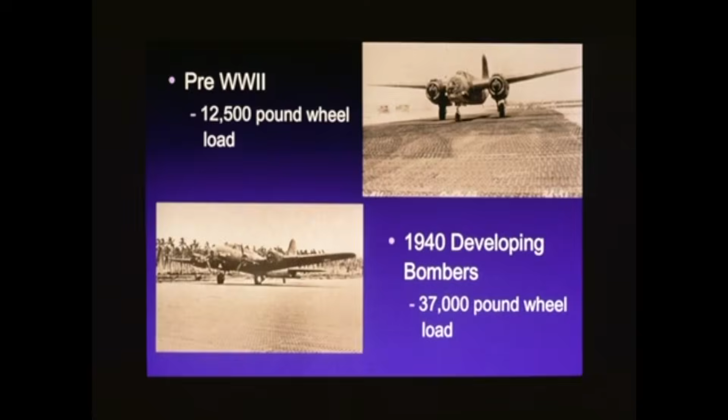Yet, bombers were being developed with wheel loads of 37,000 pounds, and far heavier ones were coming into use. Thus, the Corps of Engineers inherited a complex and urgent problem. At that time, the Corps identified airfield paving design as essentially a soil mechanics function.

Engineers recognized that the primary problem in airfield paving was the failure of the soil subbases under pavements to withstand the loads, resulting in the failure of the pavement.

Corps leaders acknowledged the gravity of the situation, and T.A. "Dad" Middlebrooks of the Office Chief of Engineers had by early 1942 become impressed with a method developed in California by O.J. Porter to calculate the bearing capacity of soils under pavements.

The penetration test was essentially a shear test, measuring the strength of the soil, while the bearing capacity was an index of that strength. Upon calculation, the bearing ratio was referred to as the California Bearing Ratio, or CBR, which provided a quantitative expression of the strength of the soil. Whether the CBR could be adopted and adapted to the complexities of airfield paving was debatable.

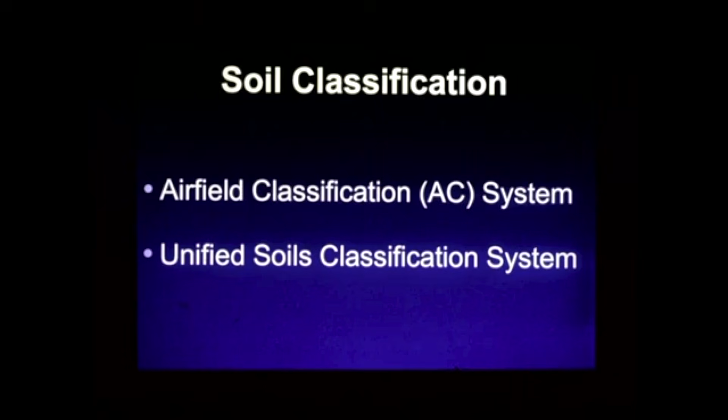Now, this is a table taken directly from a text entitled Introduction to Soil Mechanics and Foundations by Sowers and Sowers. I just want to read for you the caption under the title, but it says, after U.S. Waterways Experiment Station.

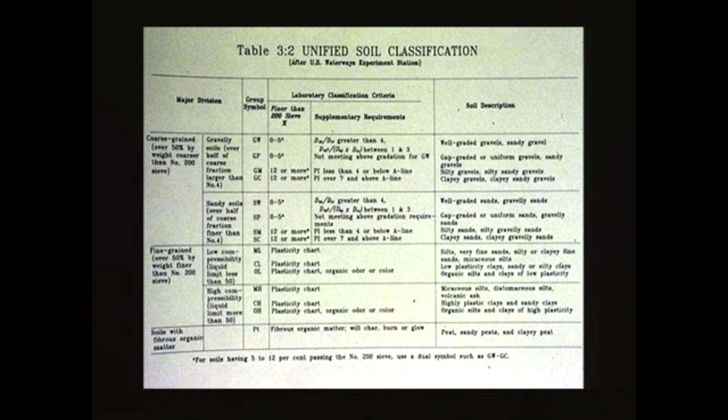This is a plasticity chart, again, taken from a text by Sowers and Sowers. And again, let me just read the acknowledgments at the bottom. It says, after A. Casagrande and the U.S. Army Waterways Experiment Station.

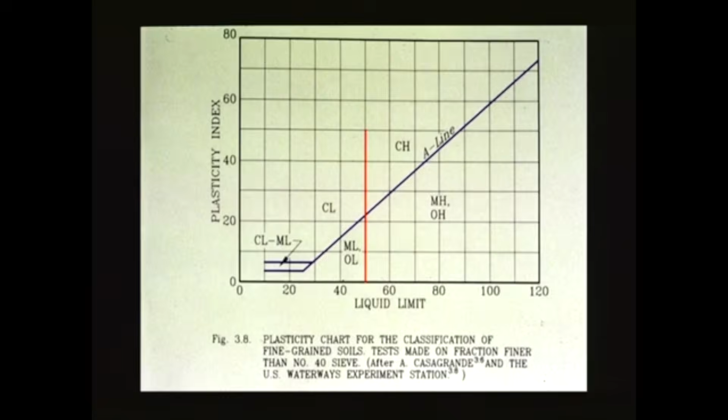All of this grew out of our country's needs for airfields in World War II. The Unified Soil Classification System may very well be Casagrande's greatest contribution to soil mechanics because of its wide and important use in the practice of geotechnical engineering today.

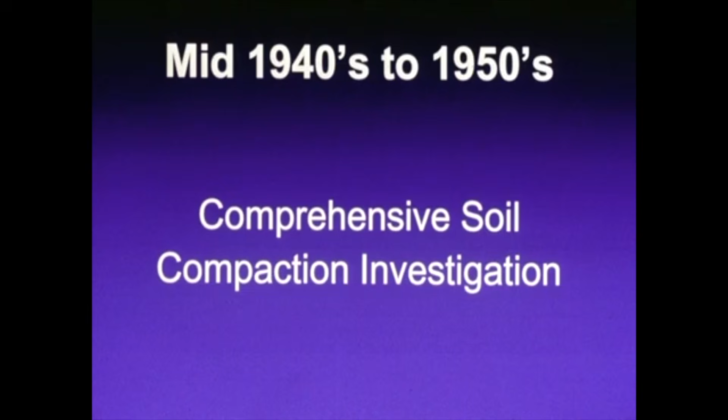Airfield designers had long recognized the importance of compaction of base and sub-base materials prior to paving, especially where flexible pavements were to be used. However, no systematic analysis of compaction requirements had been performed for airfields prior to the end of World War II.

In May of 1945, OCE authorized a comprehensive soil compaction investigation, and in June assigned the testing to WES. Immediately, project directors A.A. Maxwell and Cecil D. Burns, both engineers at WES, attempted to locate materials in the vicinity of Vicksburg.

A source of material was found, and a mixing plant built on location blended soils from a pit in large quantities, and these were spread by drag lines onto 200-foot-long test lanes.

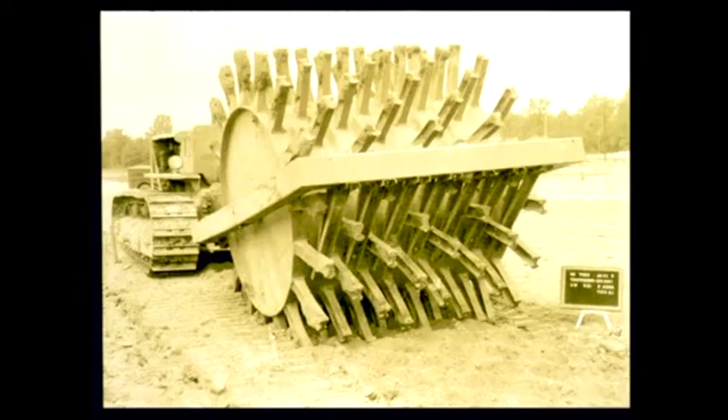Drivers then passed various compaction machines repeatedly over the lanes. This is a slide of an early sheep's foot roller.

Researchers varied the water contents of the soil, the number of passes, the types of machinery used, and other components in a complex series of tests. Field and laboratory examinations determined compaction and CBR data that were produced by each set of variables. From this, specific compaction expectations and methods under field conditions could be predicted for future construction.

In April of 1956, W.J. Turnbull and Charles R. Foster published their seminal paper entitled Stabilization of Material by Compaction. This was also later published in the Transactions of ASCE in 1958. Let me now read from the synopsis of that paper.

A soil can be stabilized by compaction at proper water content. This paper shows the relationship between strength and both water content and density for cohesive soils, and it describes the variation in density and strength produced by variations in rolling and lift thicknesses in field compaction.

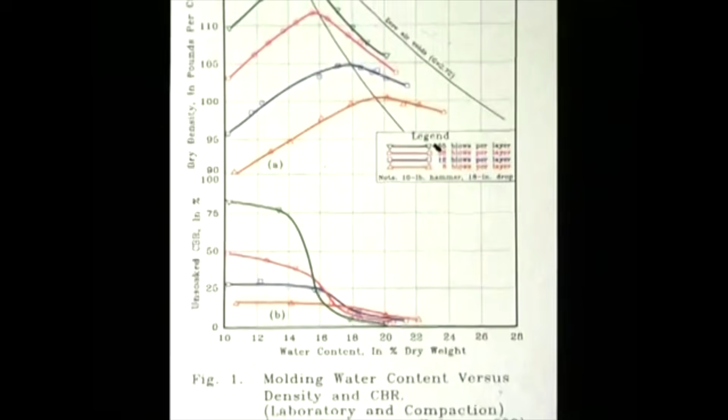These are some of the data presented by Turnbull and Foster, and across the bottom you have water content. You've got unsoaked CBR and dry density, and this is for 6 blows per layer, 12 blows per layer, 26 blows per layer, and 55 blows per layer with a 10-pound hammer falling 18 inches.

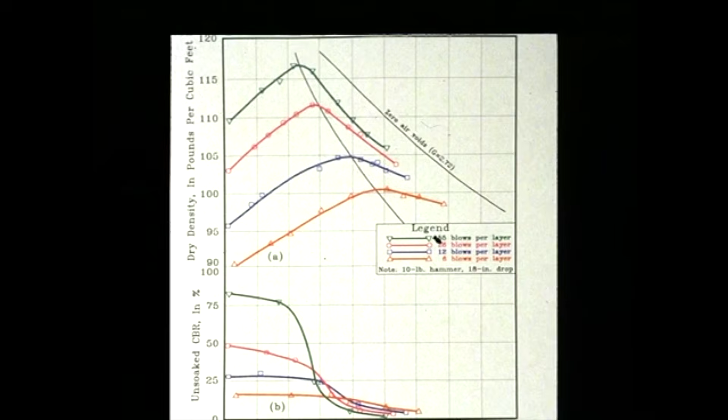This is another picture from the Turnbull and Foster paper, and again across the bottom you've got number of passes, up the side, maximum dry density and optimum water content, and we're looking at sheep's foot rollers with a 7 square inch foot, a 14 square inch foot, and a 21 square inch foot.

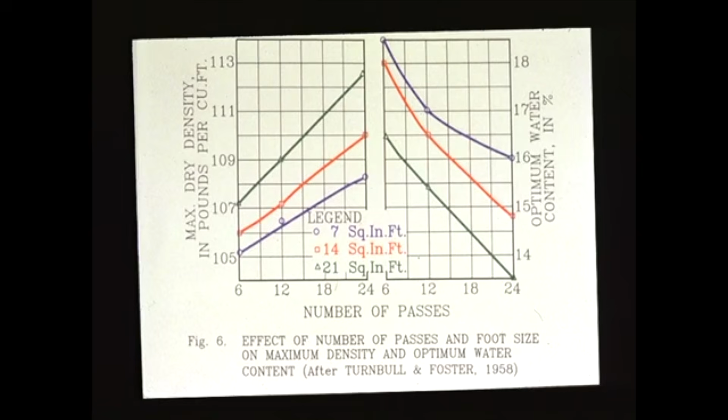Let me now just quote from the acknowledgement section of the paper. The studies described herein were conducted under the Office Chief of Engineers as part of an overall development of design criteria for airfield pavement for the United States Air Force.

Gail McFadden, Thomas Pringle, and F.B. Hennion of the Airfields Branch of the Office Chief of Engineers monitored this study, for which guidance was furnished by Arthur Casagrande, Donald W. Taylor, Kenneth B. Woods, O.J. Porter, and Philip C. Rutledge, acting as consultants. The laboratory and field work were accomplished by the Flexible Pavements Laboratory of the Waterways Experiment Station.

John Focht discusses the paper. And let me thank John for coming.

John will have heard this lecture twice, and I think my wife is the only one who's heard it more than twice, but Margaret says it gets better every time. John, I hope you think so too.

John also discusses the paper, and he flags the point that moisture content is certainly as important as density control.

Focht states that engineers should determine why compaction is desired, what he or she wants to achieve with it, and how he or she intends to accomplish it.

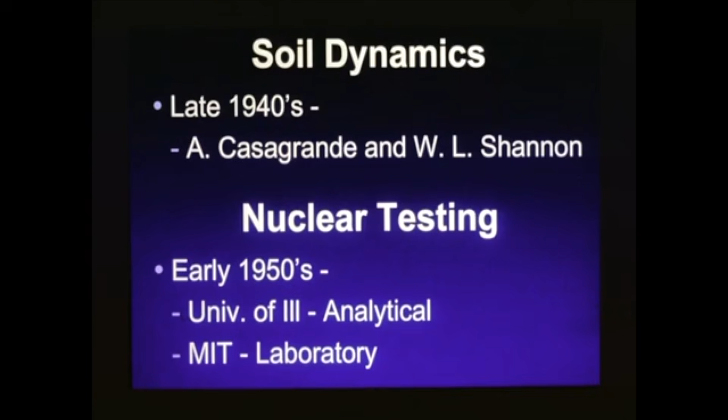In the late 1940s, W.L. Shannon and Arthur Casagrande performed the first dynamic tests on soils in the United States at Harvard. These stemmed from the fear of the effect of nuclear blast at the Panama Canal. Soil dynamics attracted relatively little attention until the 1950s, when the proliferation of long-range missiles carrying nuclear warheads capable of producing massive ground shocks aroused new concerns.

I'll now briefly cover work, both analytical and laboratory, that was conducted in the early 1950s. During the 50s, Professor Newmark and his colleagues at the University of Illinois conducted research involving the design of underground protective structures. Much of the work involved the conduct of experiments to aid in the development of numerical methods that could be used to design underground nuclear protective structures.

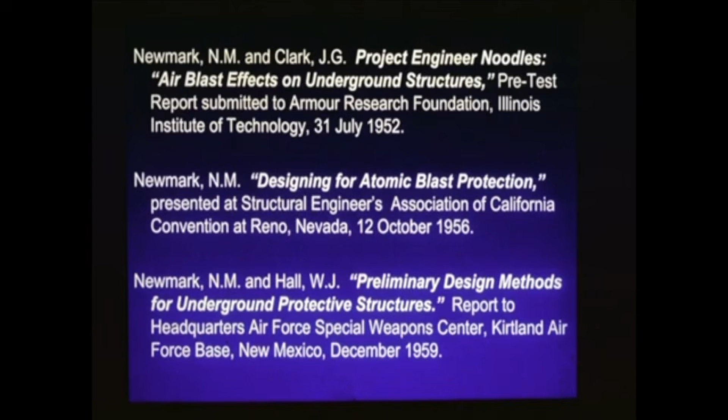The testing was conducted by the Defense Atomic Support Agency, primarily at what we now call the Nevada Test Site outside of Las Vegas. Let me call your attention to the center report here, published in 1956, entitled Designing for Atomic Blast Protection. That's a live load most structural engineers prefer not to deal with.

Strategists in the United States during this period also feared the impact of near-miss nuclear explosives on strategic defense systems such as underground missile silos. The thought was that if we have an underground missile silo and it gets a direct hit, we will sacrifice that. But if it gets a near miss, we'd like the bird cage to open and the bird to get out.

To supplement the field projects, OCE in 1951 turned to Professor Donald W. Taylor at MIT to perform a laboratory investigation on the response of soils to rapid, intense loading. During this study, Robert V. Whitman developed a large triaxial testing machine that produced a single rapid loading on samples in an attempt to simulate the shock of the explosion.

If you're really interested in knowing more, I would call your attention to the paper by Whitman, Behavior of Soils Under Transient Loading, Proceedings of the 4th International Conference on Soil Mechanics, 1957.

Now, in 1957, OCE placed WES in charge of future studies in the area. Turnbull continued the contract at MIT to perform another series of laboratory investigations, which was completed in the late 1960s and produced some 27 reports. Robert V. Whitman was the principal investigator on this contract, and this slide shows 4 typical report titles: one dealing with the shearing resistance of sands under rapid loading, one on wave propagation velocity, another on stress-strain time behavior, and a 4th on the response of soils to dynamic loading.

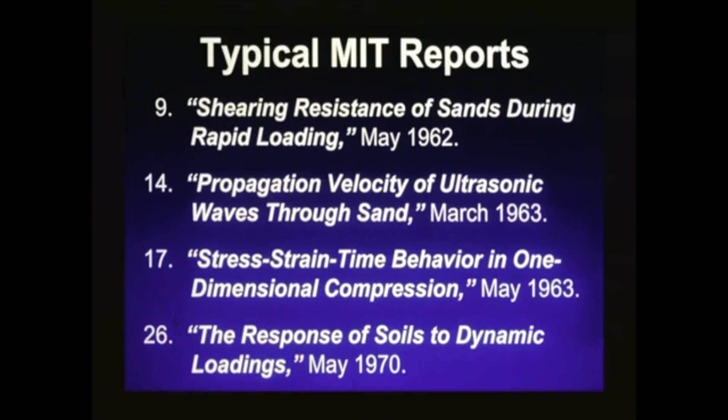During this same period, parallel work was ongoing at other universities, notably the University of Illinois, and that's the one I'm going to highlight today. I'd like to highlight a report entitled Energy Absorption Capacity of Granular Materials in One-Dimensional Compression by A.J. Hendron, Jr. and his colleagues at the University of Illinois.

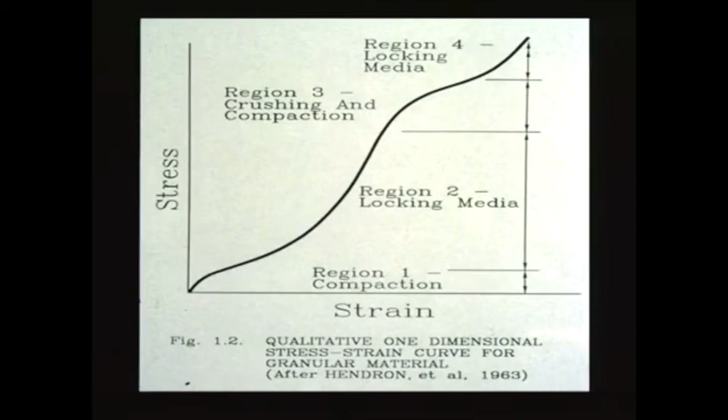The work was done for the Air Force Special Weapons Lab at Kirtland Air Force Base. Let me paraphrase from Skip's report. This is a schematic stress-strain curve with strain across the bottom and stress up the top. Skip says, as the stress continues to increase in the neighborhood of 1,000 to 5,000 psi, the contact forces become so large that particles begin to crush. The crushing is accompanied by a certain amount of rearrangement that is reflected in the concave downward stress-strain curve shown in region 3.

Energy is absorbed in this range by the creation of new surface area during crushing, and energy is dissipated as heat due to rearrangement of the new particles into a denser configuration. Both of these mechanisms absorb energy which is no longer in the form of recoverable strain energy. This work was published in 1963.

Again, the point I'm trying to make is that in the early 1960s there was a great deal of study ongoing with regard to soil properties, particularly dynamic soil properties, dynamic nonlinear soil properties at rapid, intense loadings. Because of time constraints, I'm not going to cover all the work that went on at that time at various locations, including WES, to predict dynamic response of underground structures. But I believe that this work greatly influenced the way we approach dynamic soil structure interaction problems today.

Now let me change subjects slightly.

Difficulties with Nike Zeus tracking radar systems located at White Sands Missile Range, New Mexico, caught the attention of foundation specialists in the early 60s. Unexpected movements resulted in sudden changes of direction or stopping of the radar trackers as they located targets, and further vibrations occurred as the antennas developed precise focus on missiles after launching. WES was asked to investigate the problem. Primary responsibility for this study fell on 2 engineers and a scientist, Robert Ballard and Z.B. Fry.

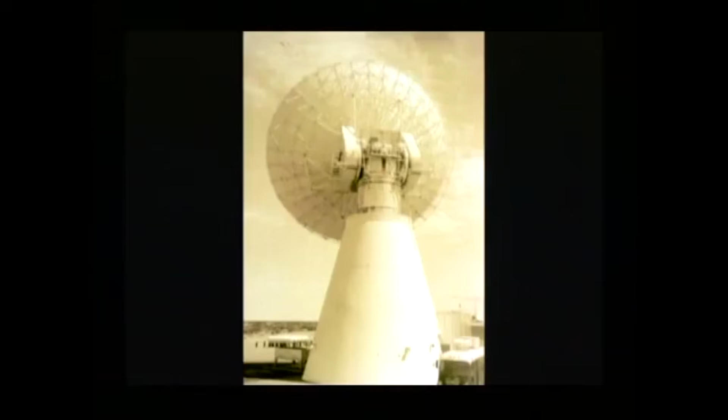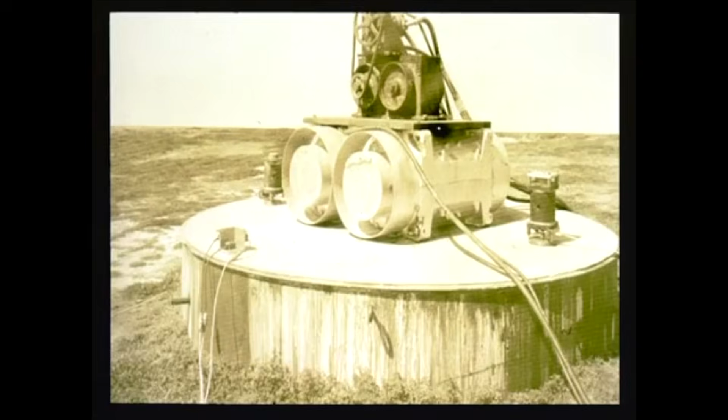This is a slide of the radar tower. Notice the circular foundation or footing. WES modeled these footings and conducted model tests both at Vicksburg and Eglin Air Force Base. This picture depicts one of those model foundations.

The forcing function was provided by an eccentric mass vibrator that had been used by the Navy to test ships in World War II. The Navy first loaned and then gave the device to WES. Weighing 5,600 pounds, the cumbersome machine and its large electric generator had to be moved by a crane. It could, however, simulate motions in 3 directions: vertical, torsional, and rocking. Placed on a circular concrete base at WES with varying static loads, it applied a dynamic load of 20,000 pounds.

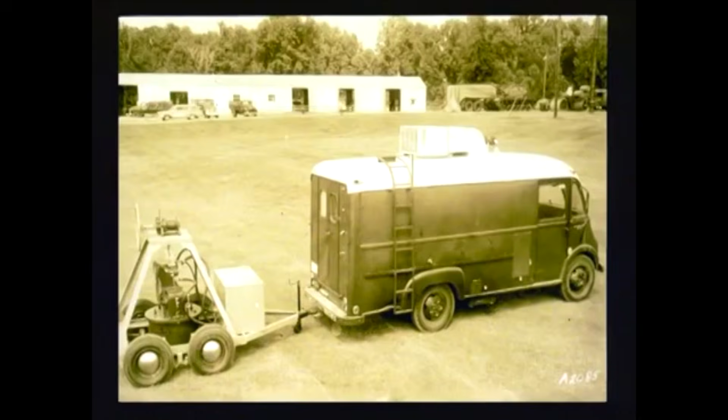Using the Navy machine as a model, WES designed a scaled-down version with a hydraulic motor capable of generating 3,600 pounds of force. The mobile apparatus shown here was trailer-mounted, pulled by a truck, and could operate on power generated by the truck engine. Its primary purpose was in the determination of Rayleigh or shear wave velocities to a depth of about 100 feet.

Many of these consultants took the WES data back to campus and developed theoretical and analytical approaches for predicting dynamic footing response. For example, I'd refer you to a paper entitled Footing Vibration with Nonlinear Subgrade Support by Funston and Hall. Let me also highlight 3 other important papers that came out of this investigation: one entitled Dynamic Response of Footings to Vertical Loads by John Lysmer and Bart Richart; another entitled Comparison of Footing Vibration Tests with Theory by Bart Richart and Bob Whitman; and a third, Design Procedures for Dynamically Loaded Foundations by Bob Whitman and Bart Richart.

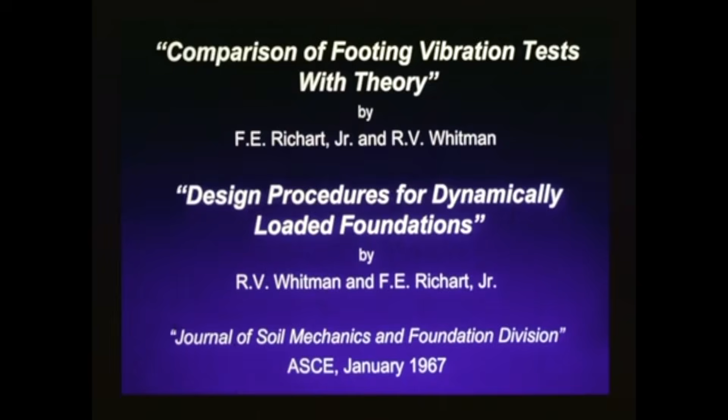These 3 papers were published in the ASCE Journal in 1966 and 1967. This figure shows a uniformly loaded half space and what we now call a Lysmer analog. Let me now show you a couple of figures taken from the Richart Whitman paper of '67.

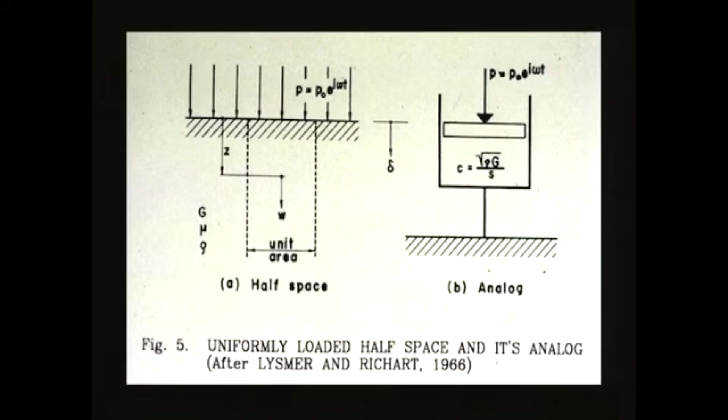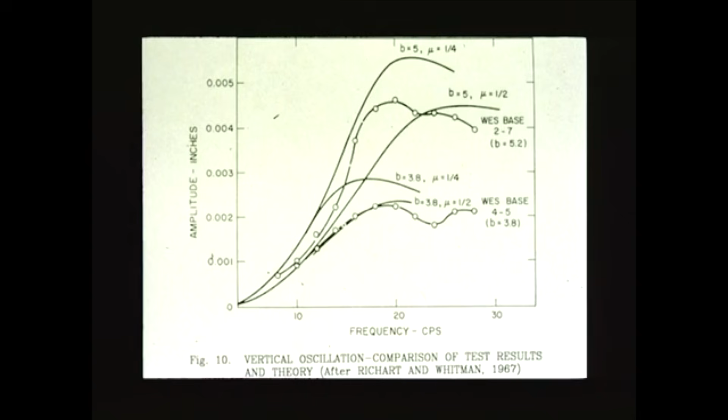Again, this shows a vertical oscillation comparison for test results versus theory. The dots are test results, and the smooth curves are theory.

This is another plot, a comparison of amplitudes of motion for torsional oscillation. The open dots are from tests at Eglin Air Force Base, the closed or black dots are from the Vicksburg site, and the curve is theory. Some of you might not think that's such a hot prediction, but it's not bad for soil dynamics.

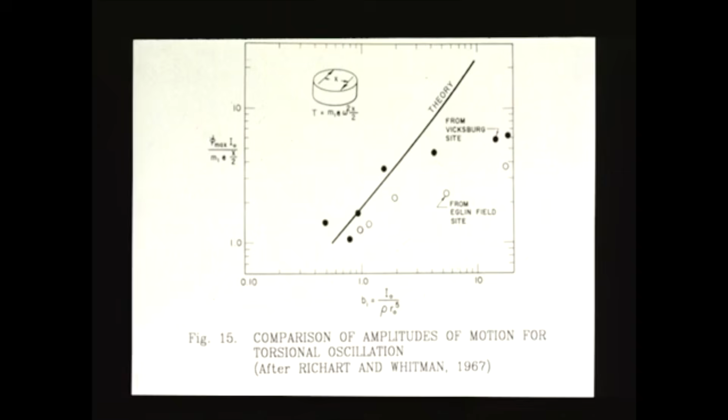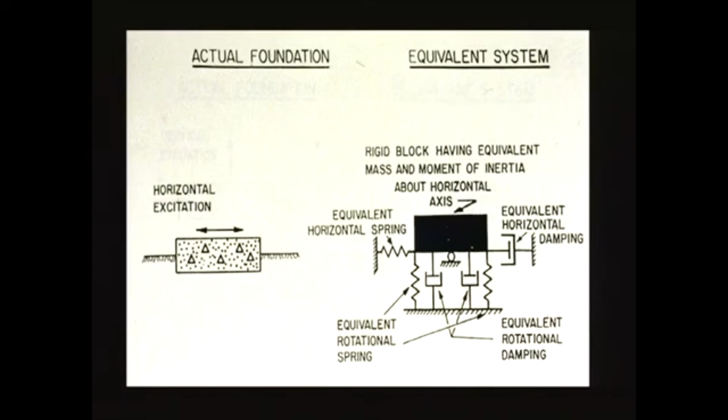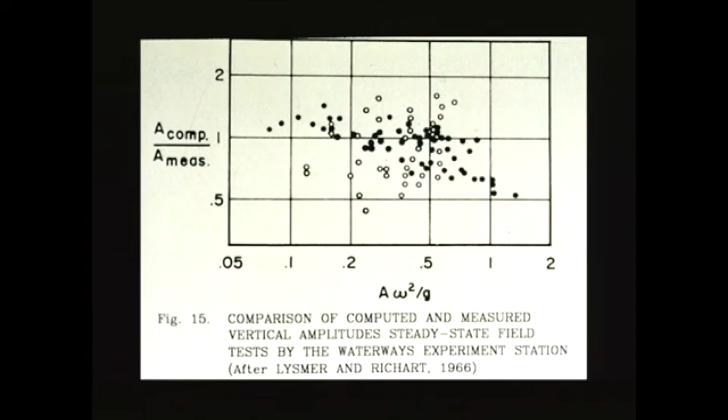This figure comes from the Lysmer-Richart paper and shows a log-log graph comparing computed and measured vertical amplitudes. If everything was perfect, all the data would plot on that line, which is 1. You'll see the data plot largely between 1/2 and 2, so for all practical purposes, the comparisons are within a factor of 2.

Much of this work led to a book entitled Vibrations of Soils and Foundations by Richart, Hall, and Woods. I argue that this work represents the state of the art in the design and analysis of dynamically loaded foundations today. The research confirmed radiation damping. Before this work was completed, people always assigned a large participating mass to the system. This work greatly reduced the size of that participating mass.

In the last 30 years, we have incorporated the effects of embedment, and we have expanded our methods to include geometries other than circular. But that's it.

In preparation for this Terzaghi lecture, I tried to determine the origin of the term rock mechanics in the United States. So far, I've been unsuccessful. Clifton W. Livingston is credited by some as being the father of rock mechanics in the United States.

Livingston was head of the Department of Mining at the Colorado School of Mines during the 1950s. One of the first publications in the field we now know as rock mechanics is entitled An Introduction to the Design of Underground Openings for Defense. This was published in volume 46, number 1, of the Quarterly of the Colorado School of Mines, dated January 1951. The volume was compiled by Clifton W. Livingston and edited by Leroy W. Goodwin.

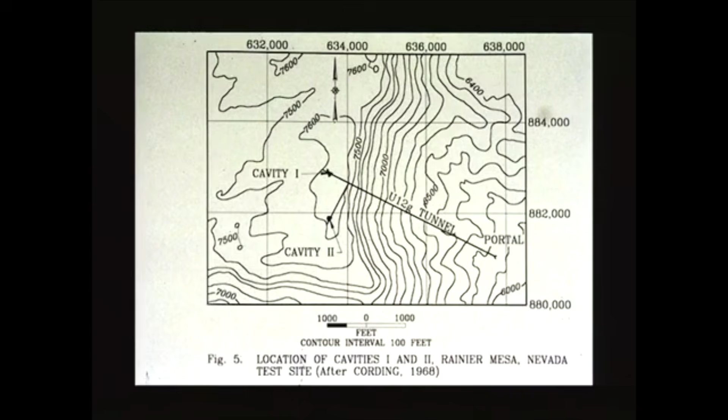The cavities were approximately hemispherical in shape, between 60 and 75 feet in diameter. Excavation started from the tunnel on two raises that were inclined at angles of 68 degrees. The top was domed to prevent stress concentration. Excavation was by blasting, followed closely by rock bolts. This was one of the first uses of rock bolts in the United States in large caverns.

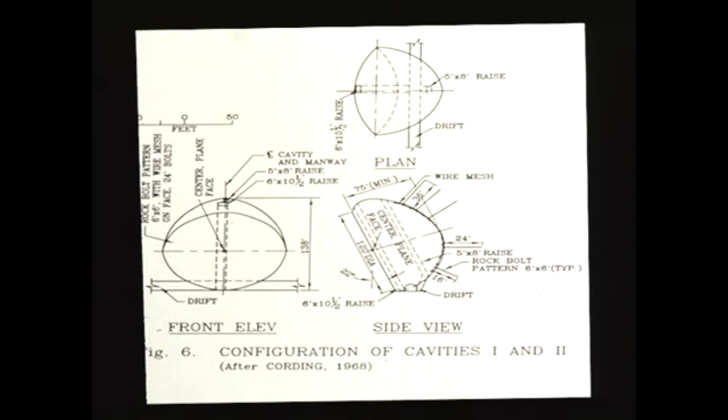Professor Deere's man on the site from December 1964 to June 1965 was Edward J. Cording, both a graduate student at the University of Illinois and a mining engineer with Fenix and Scisson. In October of 1965, Lieutenant Cording was assigned to WES. And during the period October 65 to July 66, continued his doctoral research. In July 66, Lieutenant Cording departed Vicksburg, headed for Vietnam with his entire dissertation in a plywood footlocker constructed by carpenters at the Waterways Experiment Station.

As an interesting sidebar, Ed Cording stopped by the University of Illinois for a day before shipping out to Vietnam. Professor Peck suggested that he take his final examination that day. Deere thought it was a great idea, and they assembled his committee. The thesis was defended that afternoon. The paperwork was to go forward once the thesis was completed. Cording completed the final chapters of his thesis in Vietnam, sending them handwritten to WES. WES typed and assembled the thesis.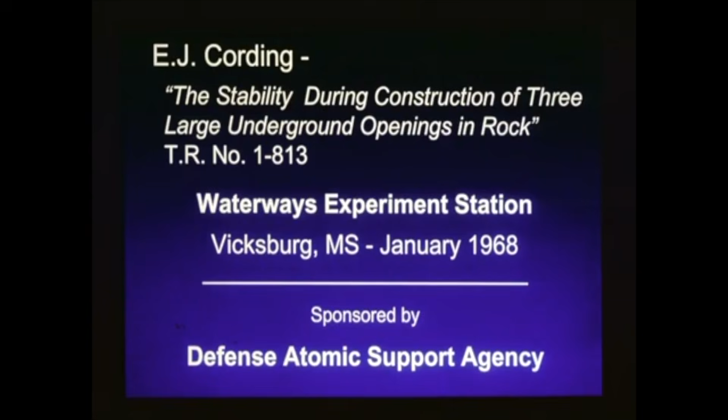Professor Peck and Deere reviewed the thesis, and M.T. Davisson walked the paperwork through the University of Illinois. Captain Edward J. Cording received his Ph.D. in June of 1967 while on R&R in Malaysia before his tour in Vietnam ended. His dissertation, The Stability During Construction of 3 Large Underground Openings in Rock, was published by WES.

But let me mention some names of people who have worked at the Waterways Experiment Station that are household names in the geotechnical community. I'll start with George Osterberg. I've already mentioned John Focht, Jim Mitchell, Mike Duncan, Wayne Clough, and Skip Hendron. I'll stop there because I don't want you to think that all the good ones left.

If you will, let me fast forward to the 1980s when the Air Force Ballistic Missile Office was interested in conducting a study evaluating the effectiveness of rock bolts of various lengths. W.O. Miller, and I know him as Yogi Miller, an engineer at WES, designed and fabricated a polyaxial load frame to conduct physical models of experiments of rock-bolted tunnels. The work involved the development of a large-scale facility, the development of suitable rock simulant, the development of scale model rock bolts, and the testing of model tunnels.

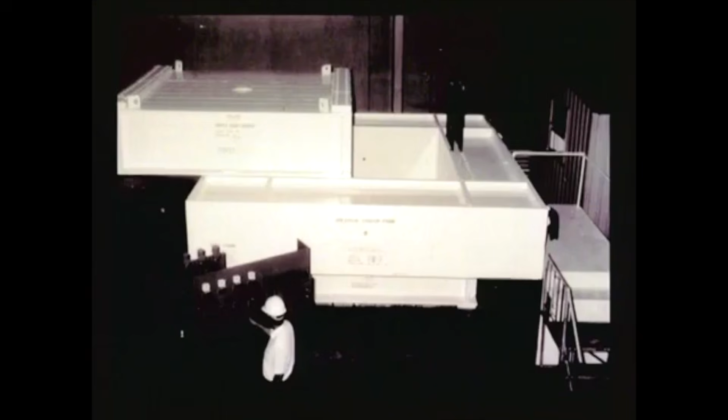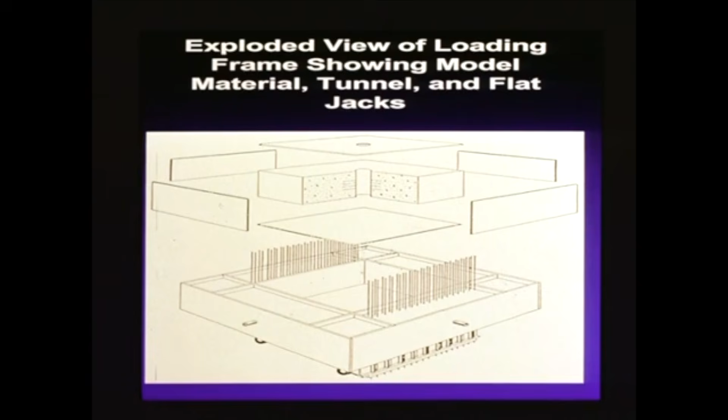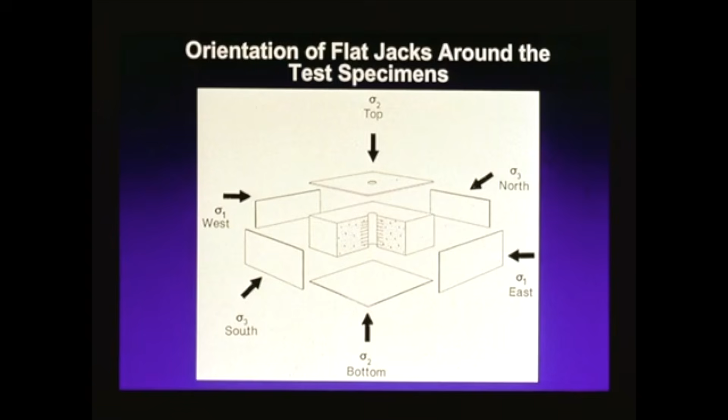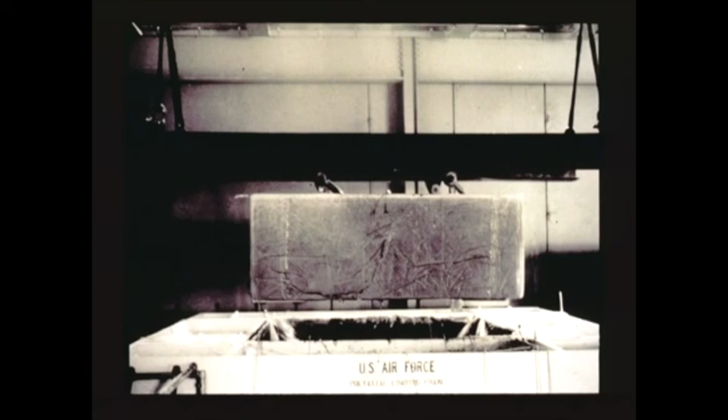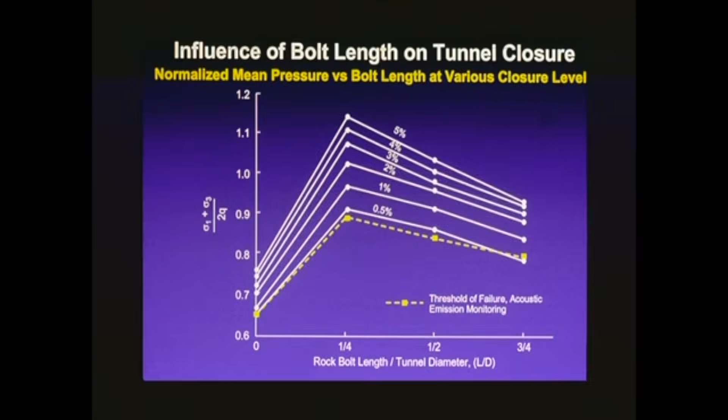And this slide shows the influence of rock bolt lengths on tunnel closure. If you will, this is a normalized mean pressure. This is rock bolt length divided by tunnel diameter from 0 to 3/4. And this is tunnel closure, 1%, 2%, 3%, 4%, 5%. And you see you get more stability at a rock bolt length of about 1/4 of the diameter. If you think about this a little, if you've got a long rock bolt, this end is fixed, this end is moving, and the rock bolt fails in tension. If you have a shorter rock bolt, both ends can move and you can get more deformation before you get the ultimate strain.

The tunnel also deforms as a thick wall cylinder. Much of this work formed Miller's PhD dissertation here at Texas A&M, and it yields a design scheme for more stable tunnels and the potential for saving up to $5 million per mile of tunnel construction. I should mention that Miller's research was targeted at high stress, low strength rock tunnels. This is deep tunnels in weak rock. The relationships are not necessarily the same for lower stress, higher strength rock tunnels.

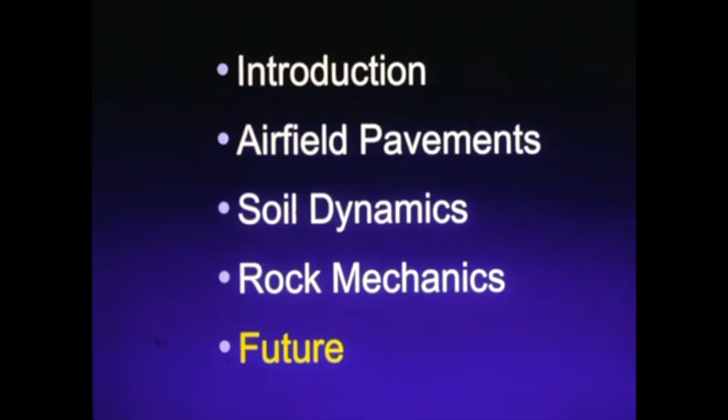Now, up until now, I've been talking about the past, and I'm a whole lot more comfortable talking about the past than I am the future. But I'd like to talk just a little about the future. I've tried to make the point that WES has a long history in conducting scale model and full-scale experiments.

I've mentioned field test sections that were constructed to study compaction, full-scale tests conducted at Nike Zeus radar towers, vibration tests conducted of scale model circular footings, full-scale studies of rock-bolted underground structures, and scale models of rock-bolted tunnels tested to failure. Such studies are complex, important, require a team of people, expensive, and sometimes critically necessary to understand the phenomena and behavior in complex situations. And I would argue that the government is uniquely situated to conduct such experiments.

These are exciting times, times of rapid change and an increasing rate of change. Some of you in the audience are aware that the Corps has recently reorganized its R&D community into the U.S. Army Engineer Research and Development Center. The acronym is ERDC, pronounced ERDIC, with headquarters at Waterways Experiment Station.

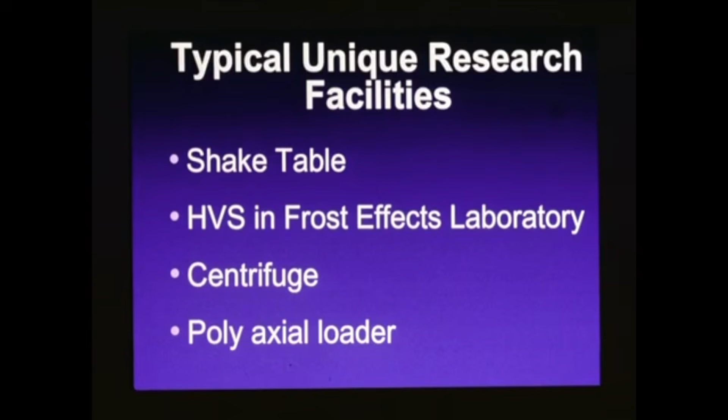This is a slide of a 3-dimensional 12-foot by 12-foot shake table located at the Construction Engineering Research Laboratory near the campus of the University of Illinois, capable of shaking models that weigh up to 60 tons at a frequency range of 1.5 to 15 hertz with displacements of up to plus or minus 6 inches.

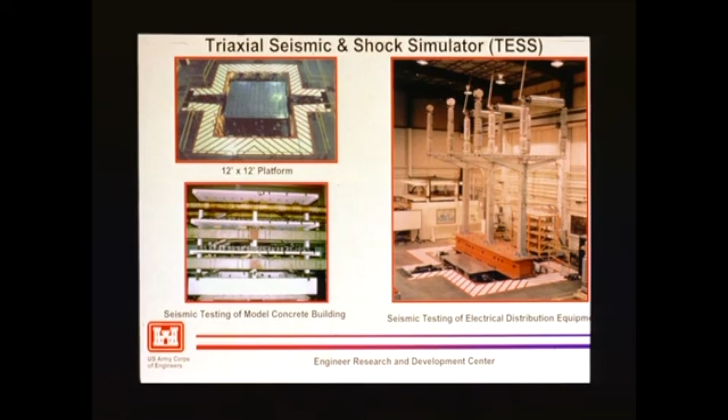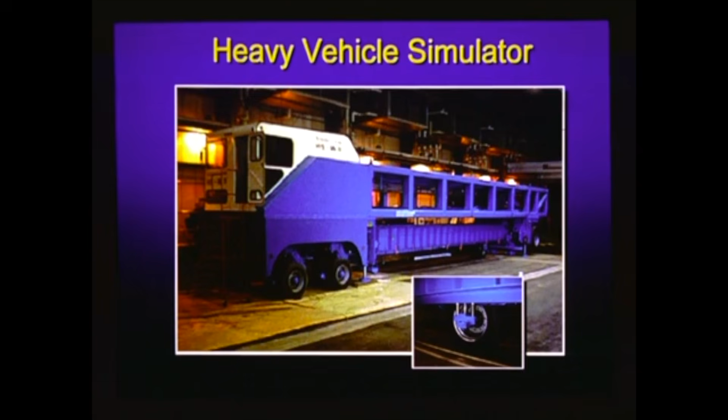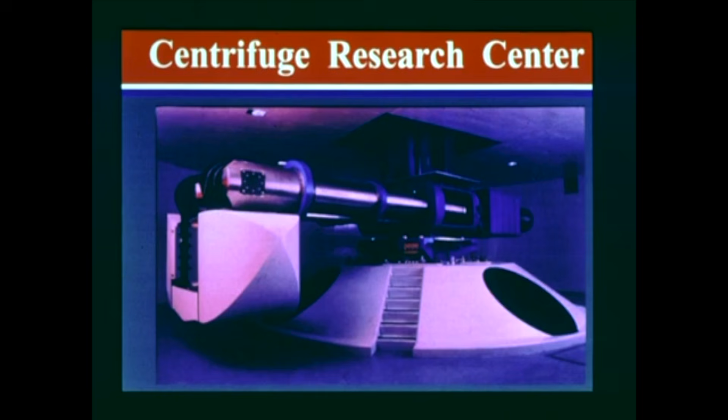Our Cold Regions Research and Engineering Laboratory, and I shouldn't say our anymore, because I've retired, but nevertheless, we have a heavy vehicle simulator located inside a frost effects laboratory where one can investigate the freeze-thaw cycles of pavement systems under simulated real-world conditions. Shown here is our centrifuge, capable of conducting model studies of up to 350 Gs, using models that weigh up to 8 tons. And you've already seen our polyaxial loader at the Waterways Experiment Station, capable of conducting various model studies.

These and other facilities poise the Corps to move the Army to the Army of the future. And until recently, we called that the Army After Next. The vision includes such items as a 1 million-pound aircraft, vehicles capable of moving across the battle space at 100 miles an hour, and technology for homeland defense.

I've mentioned that in the past, we've had relationships where graduate students came to WES and other Corps labs, many times on active duty, and participated in research and completed their dissertations. The Corps of Engineers currently has a memorandum with the National Science Foundation. This document is dated 29 March 1996 and allows academic researchers and their graduate students the use of facilities at Corps laboratories on a reimbursable basis.

I have a vision in which the National Science Foundation and perhaps other government agencies could develop a pool of money such that these facilities could be made more or less free to academic researchers and their graduate students. I say more or less free because things that are truly free are not highly valued. Consequently, I'd like the people who use these facilities to pay their own travel and their own per diem.

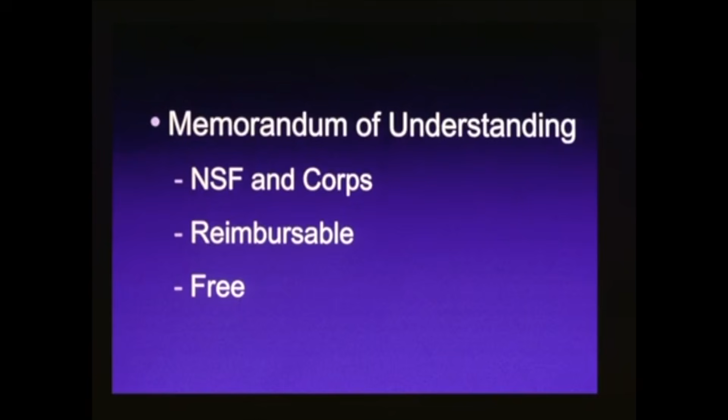Such a venture is a win-win situation for everyone. It allows public access to equipment that would otherwise be unavailable. It provides maximum use of DoD facilities that would otherwise go underutilized. And in the last year, discussions have been initiated with NSF to make this become a reality. And the hope is to have it in place soon.

During this presentation, I've painted a picture of cooperation and synergy among the government, private sector, and the academic community. This has been a team effort, one of engineers working together to address critical issues of our nation and our national defense. Now let me briefly discuss 2 or 3 areas of research with a high potential for future payoffs.

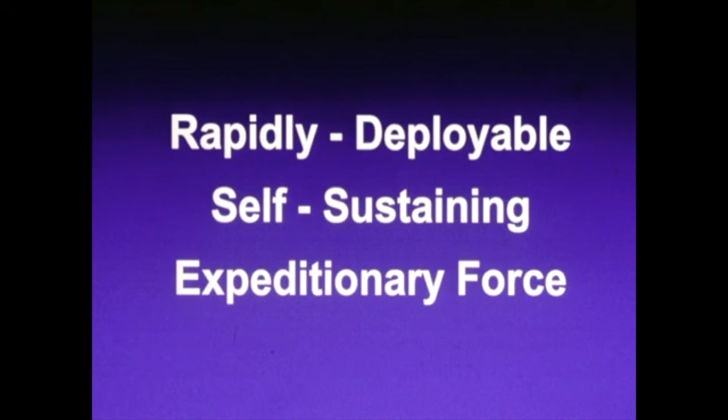A current vision in the Department of Defense is to have a rapidly deployable, self-sustaining expeditionary force. And for you Marines in the audience, I'm not using expeditionary in the doctrinal sense. Such a force could be deployed anywhere in the world, carry out its mission without dragging a large logistics or sustainment tail behind it. From a geotechnical engineering viewpoint, this will require maximum use of indigenous materials for construction, repair, and maintenance of field fortifications, in theater of operation roads and airfields, or in the battle space roads and airfields, and lines of communication.

Let's just focus on the use of indigenous material for construction, repair, and maintenance of in-theater roads and airfields, and the potential benefit the results of this effort will have on the private sector. If we're successful at developing methods to use low-quality or out-of-spec materials for repair of transportation infrastructure, the application of this technology could potentially save billions, that's billions with a B, of dollars as we go about repairing our transportation infrastructure in the United States.

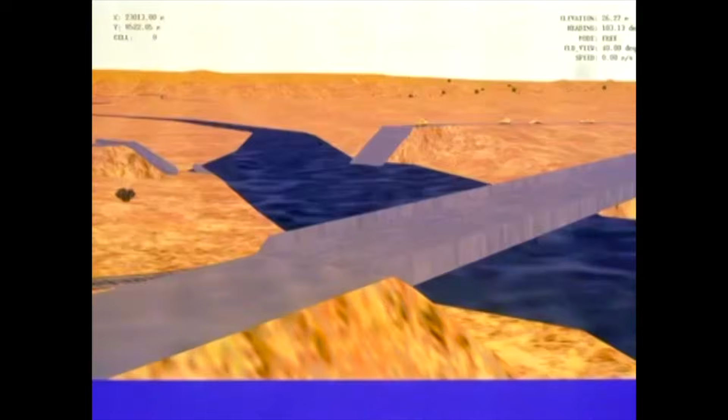Much of the future training of the armed forces will be conducted using computerized war games and simulators. The natural environment must be understood and characterized, and we're a long way from there. These requirements will drive engineering technology in the future. Another Army requirement associated with creating a virtual battle space environment for training purposes is what I call putting engineer activities into the models. For example, what is required and how long will it take for an infantry battalion to cross a given river at a given location if the bridge is destroyed?

Again, if we're successful at creating a realistic, dynamic, synthetic, natural environment and accurately modeling the engineer activity, imagine the spin-offs that this will have for the civilian engineer and the construction community. For example, large, complex construction projects such as the construction of a dam could be completely rehearsed, and project managers could plan and manage staffing and material requirements as a function of time more effectively than ever before.

In a sense, the point I'm trying to make is something that many geotechnical engineers already know. Our computerized capabilities have far outstripped our site characterization capabilities. Thus, if we're to exploit our computational methods, we need to accelerate our work in soil properties and site characterization. Other current Army requirements that are driving engineering technology include homeland defense, terrorist threat protection, and minefield and unexploded ordnance neutralization.